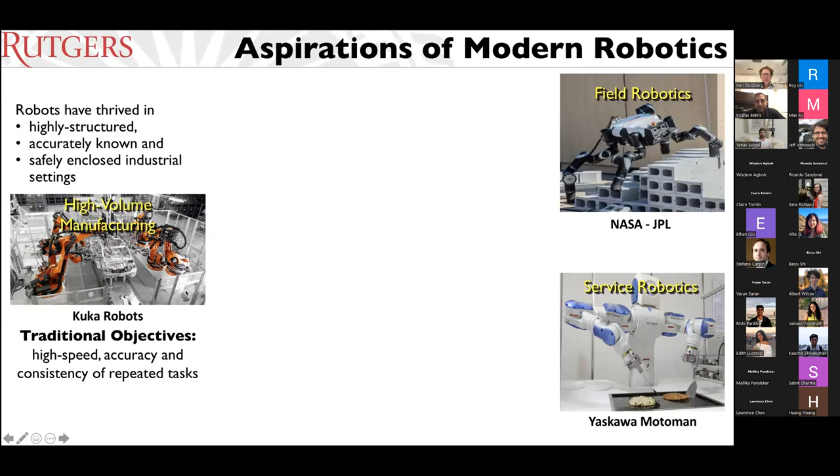But I think where we are today in terms of applications, we're somewhere in between the highly structured setup of manufacturing to the completely unstructured setup. And I see autonomous driving as a stepping stone towards field robotics, and I see logistics as an important stepping stone for service robotics. I'm joking sometimes that, if e-commerce had not been discovered, perhaps roboticists should have discovered it to make progress with robotics. Because it is a setup where we can have a little bit of structure.

We know perhaps the general location of where objects can appear, but at the same time, relative to manufacturing, we have a much larger variety of objects that can appear. So this allows us to get access to data to train methods that allow us to eventually get perhaps into the home, where we have to deal with more deformable objects like food and other more challenging setups. So in this transition, we want to also achieve different new objectives and go from the very fast, accurate, very repetitive robots of the past to robots that are much more adaptive, versatile, robust, and safe.

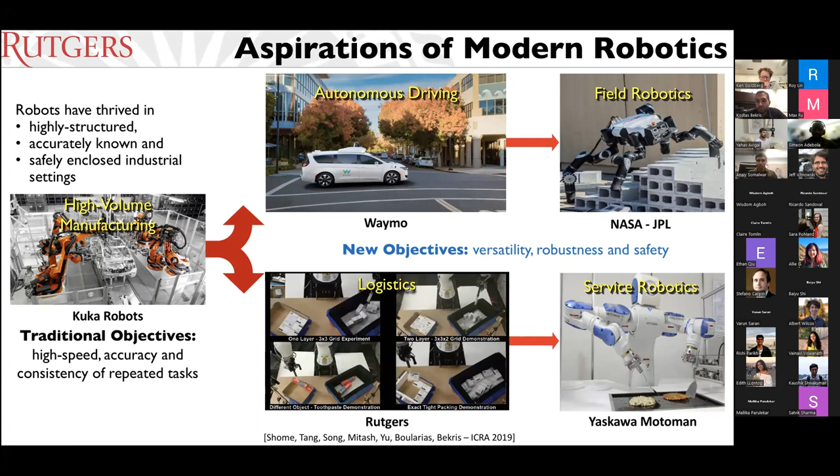So I'm coming from the computer science side. So the question is, how do we put together robotics AI systems to address these challenges? And I'm going to use the domain of logistics first as the application domain for solving such problems. So I'll go back in time in my academic career, to 2015, where Amazon announced their picking challenge. So we were tasked, academic teams, to pick objects from a shelf. So we had to detect that object and be able then to pick it up and drop it into a bin.

We had a limited amount of time, so we tried to put together a system that was executing rather a textbook architecture: sense, plan, act. We were first reasoning about the order of objects to pick, then the perception was responsible for detecting objects, estimating their 6D object pose, and then we planned towards specific grasps and collision-free object motions to do pick and place, and then we executed that. I think this is a very popular pipeline, and one can ask what could go wrong in the Amazon picking challenge with this sense-plan-act architecture.

Well, everything can go wrong, right? Your sensing is going to have noise, maybe erroneous. Your planning may not discover solutions even when they exist, given computational limitations. Your execution may be erroneous, and this is where we have this emergence of this gap between perception and planning, and how the communities have kind of developed solutions independently, not necessarily thinking of the integration in the context of robotics. As a motion planning person, very frequently we assume that perception has solved all of the problems in terms of providing us an accurate representation.

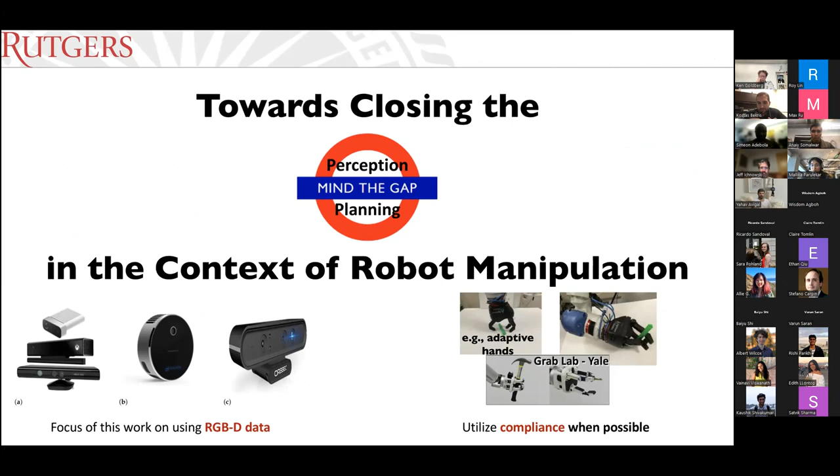So I'll try to get into how we are trying to approach these two gaps, and I'll first focus on the gap between perception and planning, especially in the context of robot manipulation. I'm going to assume in this discussion that our sensing information comes in the form of RGBD data. I'm not going to get into tactile information. Our work has been primarily on vision-driven manipulation, and we'll try as well to use compliance as much as possible in a lot of the efforts that I'm going to be describing here.

So let's get into another case study of a manipulation challenge that we worked on. Before I described this traditional sense-plan-act implementation for the Amazon picking challenge, let me talk to you about a packing project that we worked on a few years later, back in 2019. Our challenge was to pack objects that appear originally on a bin in an unstructured pile. For instance, you could have this toothpaste and this soap, and you want to tightly pack them into a new bin, and you have to transfer them.

We assumed that what we had access to was a minimalistic end effector, just a suction-based end effector, and we had a 7 degree of freedom Kuka arm, 2 RGBD sensors, one focused on the picking scene and one focused on the placing. And the first thing that we did, we went ahead and did the baseline approach.

We would sense to detect the objects in the original bin, pick them, and then place them into the target bin.

And what can go wrong? Every step of this process can go wrong, and you have to think about the feedback loops you need to introduce to make the solution robust. The actual pipeline we implemented had a lot of these feedback loops: what if the pick in the initial unstructured pile failed? What if the transfer failed? You have to resense and reevaluate what happens in the environment. We had to develop adaptive behaviors that would allow us to solve the problem effectively.

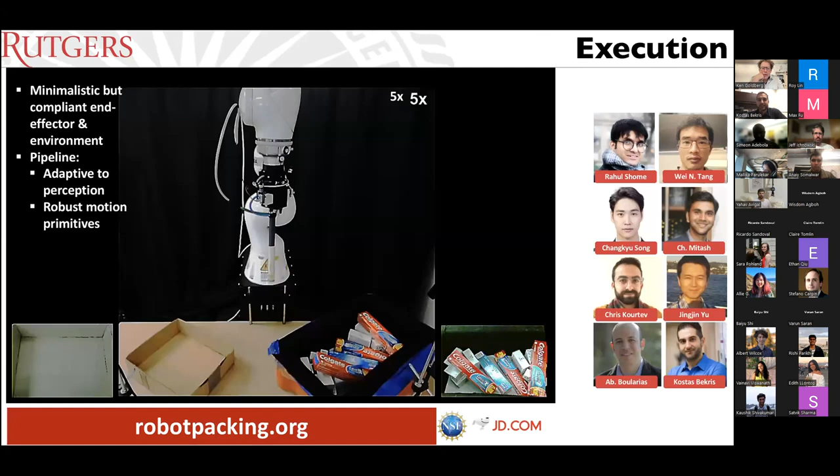So that's an example of how your high-level task planning process can actually introduce corrective primitives that adapt to failure, and we could then solve problems as I showed before, where we have a heterogeneous set of objects. We perform pose estimation as well in the target bin to figure out what is a good pick location, and incrementally remove objects and pack them.

We were able here to figure out which ones are toothpaste versus soaps, and separate them and do two separate packing tasks. So I'll jump a little bit forward here.

You're seeing the placement of the soaps, and here it's a situation where we pick it from its stable surface, and we have to raise it to its less stable support surface. Compliance at the surface of the initial bin helps with that, and then we can apply suction in order to place it into the target bin at the desired configuration.

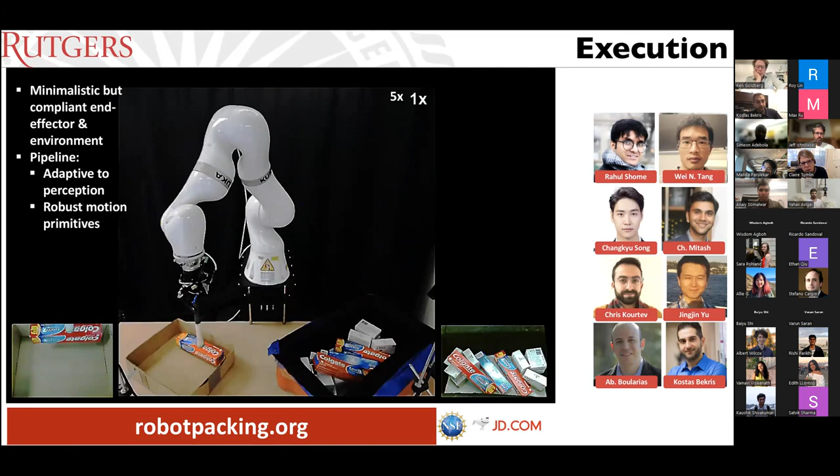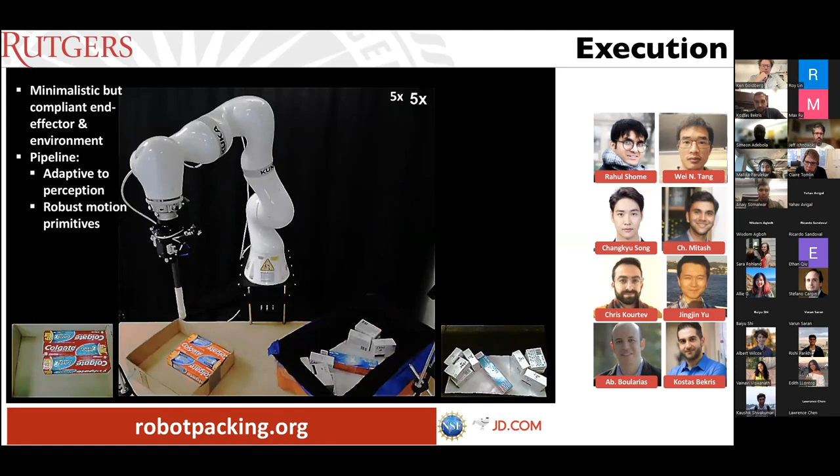Kostas, can I ask a question on this? Sure. How do you know—and maybe the answer is you don't—but how do you know ahead of time that the three kind of adaptive actions you've proposed will solve the issues you've observed? Is there a way to geometrically capture the issues and then say, ah, I really need these three corrective actions, and with that I can span the space of corrections I need to get the packing result I want?

Yeah, so here we manually define the behaviors by experimentation and figuring out failure modes, and then realizing how we need to address them. But you're right, it's very important to be able to verify some conditions, so that if you have a target specification for what needs to be achieved, you can verifiably get to that given all the failure modes. We have some line of work trying to figure out the conditions under which a behavior is going to succeed given a specification, but it's not mature enough to be deployed in a complete manipulation pipeline. So here we had to manually come up with these behaviors. Thank you.

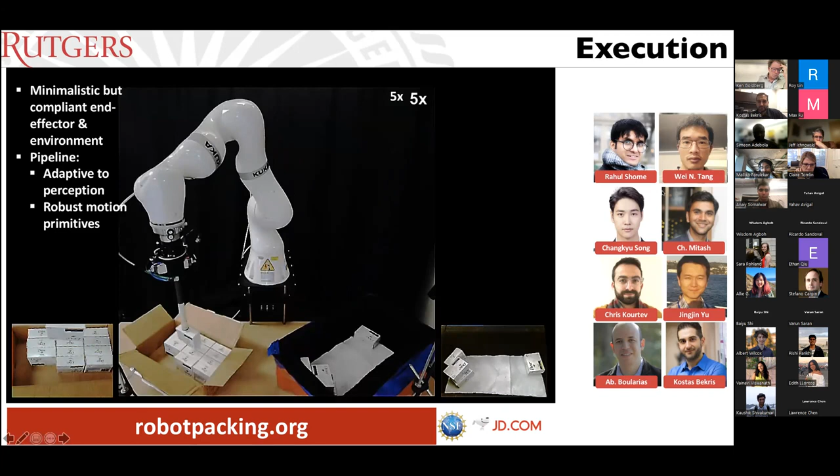And the focus of this work was mostly on the high-level planning and how to make it robust. But what about the perception side of things? How can we make perception much more informative for manipulation pipelines?

We started moving more towards perception solutions that are not just generating a single snapshot of the world and statically reacting to it, as we were doing during the Amazon Picking Challenge, but perception that streams continuously information about where the objects are inside the environment, so that your high-level reasoning can adapt to failures because you have updated information from performing continuous pose tracking for the objects.

So far we have primarily limited ourselves to rigid body pose tracking, reasoning about the 6D pose of the rigid body—the 3D position and the 3D orientation. Performing 6D pose tracking is challenging because you cannot easily get labels in the real world.

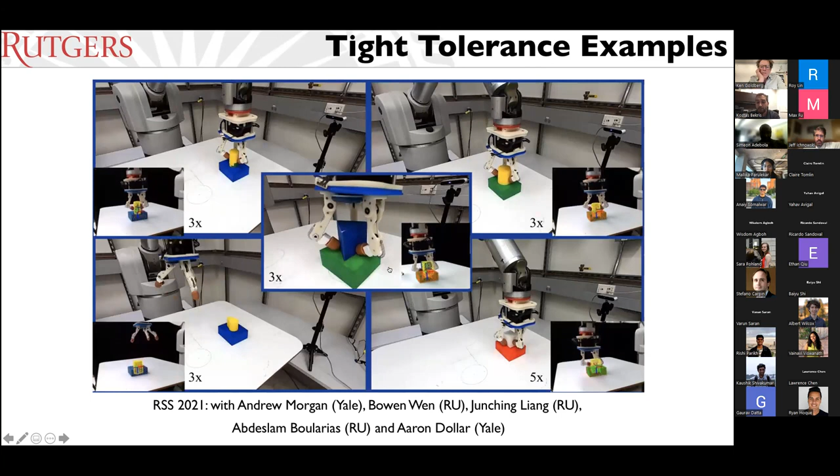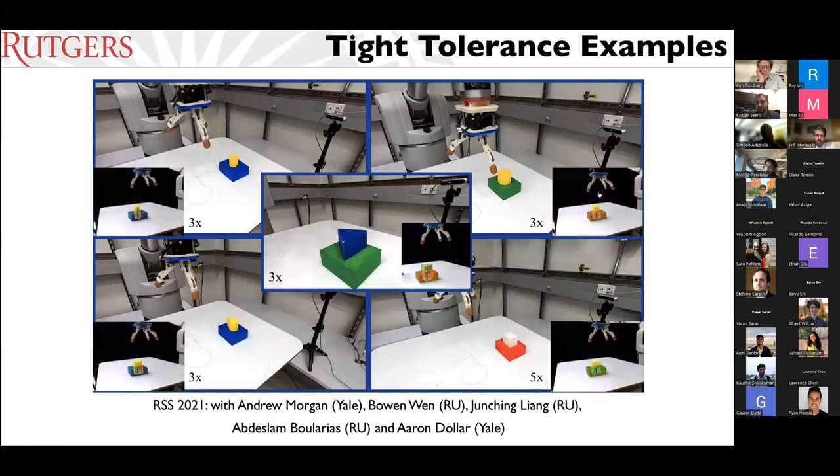The actual manipulation, planning, and control pipeline doesn't reason specifically about the object geometry. It figures out what changes in SE3 pose it needs to achieve given what the tracker returns, and then performs the actions for how the fingers need to be manipulated. This pipeline has a lot of elements: compliance, visual tracking at relatively high frequency, and closed loop operation between the planning and the perception.

If we kept compliance but reduced the update rate of control relative to perception, introducing delay between when we were updating actions, we almost had catastrophic failure in terms of the pipeline. The tight closed loop operation is also very critical to make this work.

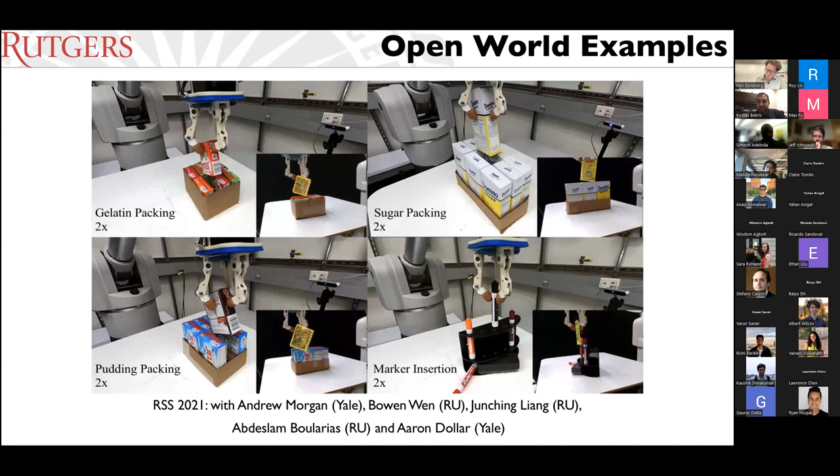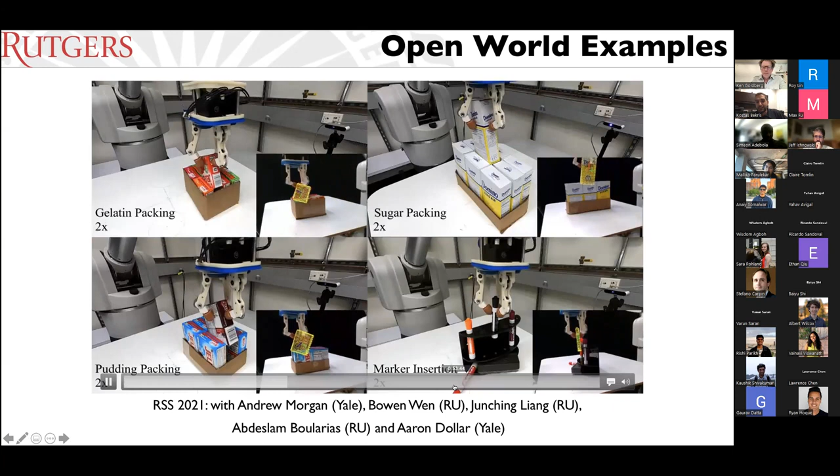This also allowed us to tackle some more open-world examples, again packing problems where this time the tolerances are tighter, especially the marker insertion shown on the bottom right, which is a very challenging problem. It's very difficult to see, with not a lot of point cloud elements on the marker, and again a very tight setup to insert it. Or this plug insertion problem, in order to power up, to provide power in the plug, or the cup stacking problem where we have to put a sequence of objects one on top of the other.

Now, something that you may complain about, yes?

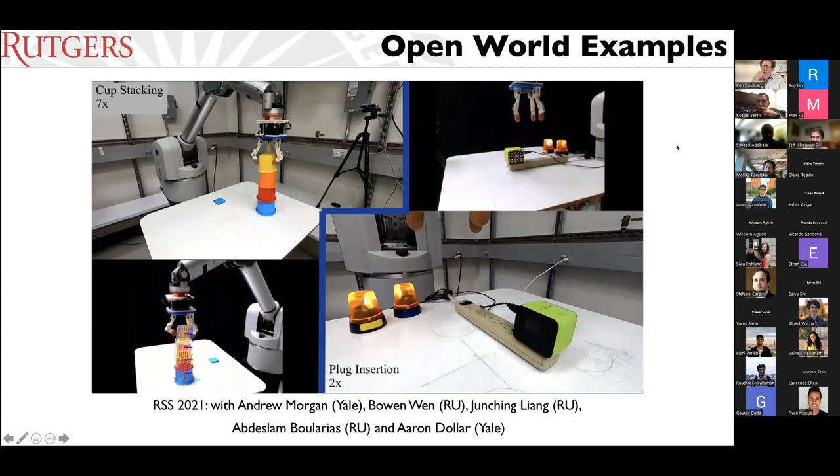Can I ask a quick question? I've got to know this, I've been holding my question, but how do you deal with the symmetry around the, like the cylinders, and tracking that?

Is that just inherent to keeping it frame to frame consistent? In the stacking problem, the symmetry doesn't necessarily harm you from the control side, but you're right on the perception side. It's a challenge, especially when there are multiple solutions. The approach ends up minimizing unnecessary rotations if all solutions agree in terms of what you see relative to the previous frame. So it minimizes rotation relative to the previous frame as long as it agrees, and it actually works good enough.

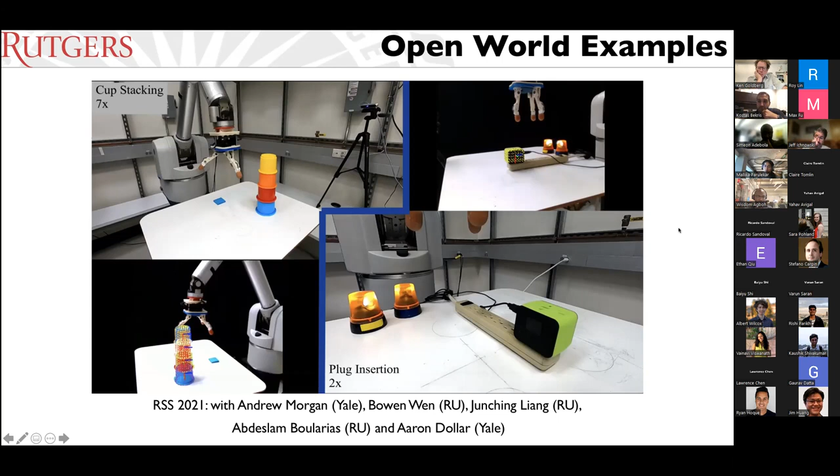Now, something you may complain about is that for all of these objects, we still use models, right? We have to have the CAD model beforehand in order to solve these manipulation challenges. In many application domains, like e-commerce where a company may be shipping millions of items, can you expect that you will always have access to an accurate model for the object you're going to be manipulating?

Something else that may worry you with this pipeline, like SE3 TrackNet, is that we have a network that computes a difference for every frame relative to the previous frame. But if you have a consistent error in that estimate, will this error accumulate over time until you're not able to correctly track the pose? At what point do you need to close the loop, similar to SLAM, and reason about older frames to understand that you have deviated from your estimates?

So in the most recent work we've been doing on pose tracking with my former student, Bowen, we focus on the case of tracking without object models, which is a bit of an ill-defined problem—coming up with a pose without having a model. The idea is that if you have an RGBD sequence, like this manipulated object, but you don't have access to the model, you do have a mask for that object in the initial frame. You extract a segment from the point cloud corresponding to the object, and want to figure out the relative transforms of this point cloud as the object is manipulated, relative to the original frame. If in the original frame you can figure out the pose of the object relative to the camera, then you would have absolute poses for the object in the global coordinate frame. So here, no object model is harmed during this project.

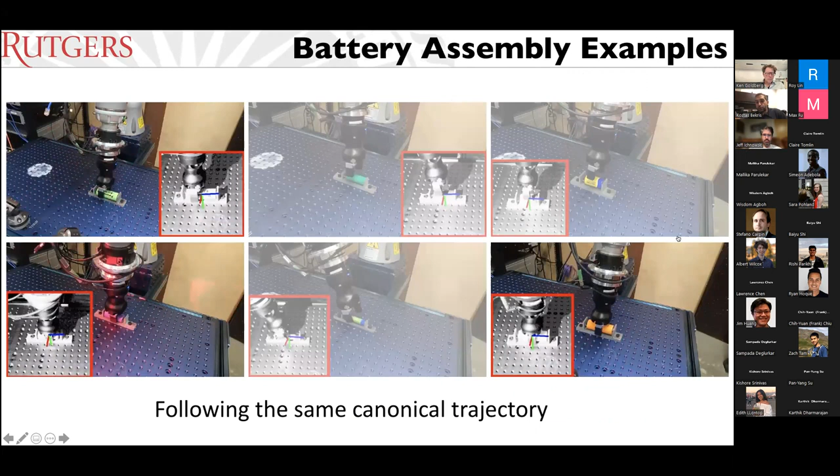And this allows us, for instance, here you see we have done one demonstration of a battery being inserted. And then we're able to transfer it to a variety of different batteries, as it is shown here. All of them follow the same canonical trajectory, and these are different batteries. The same BundleTrack approach is used to track the trajectory, both in the demonstration and in all of these execution videos.

I don't know if you have any questions, and I don't know how much time I have. This covers the efforts that we have been focusing on: having fast, high fidelity tracking and reducing the information requirements of the perception approaches, so as to generalize to new object models, and then putting them into complete pipelines where we take advantage of these high frequency perception updates in order to then perform the manipulation planning.

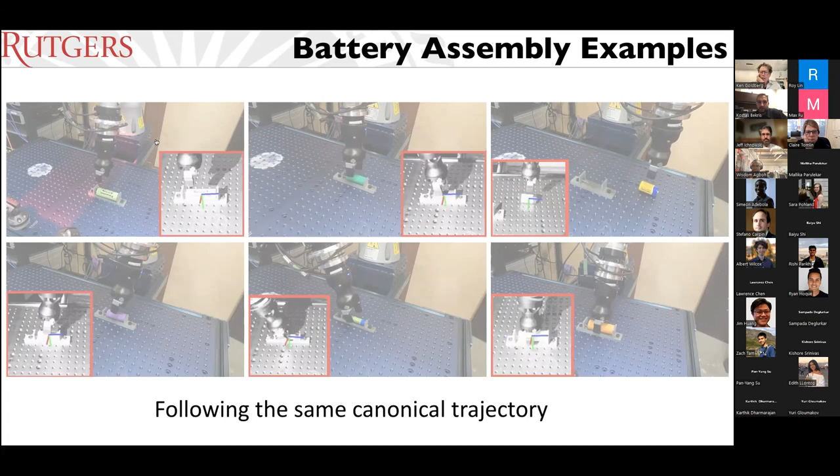Great. Thank you, Kostas. Very impressive. One thing, I want to just keep an eye on the time. It's a little before 5, and I know you were going to talk a little bit about the new work as well. So, yes. If we have time, I can try to go a little bit, and it's a switch of theme. It's not manipulation. It's still about compliant mechanisms, but this time for these tensegrity locomotion platforms. Okay, I think it's good. We have a good number of people still on. I have to move to a different lab, so I'm going to switch over to my phone if I can, and can continue on that. I may get broken up, but I'll let others chime in. But we probably could go for another 10 minutes. Okay, sure. Okay, great. Thank you so much, Kostas.

Yeah, and the focus of this second part, it's a smaller part, is more on the simulation-reality gap. I referred a little bit to the simulation-reality gap when I talked about synthetic training of perception methods. But here I want to emphasize more on learning controllers for systems with significant dynamics, and we're motivated quite a bit by these tensegrity robots.